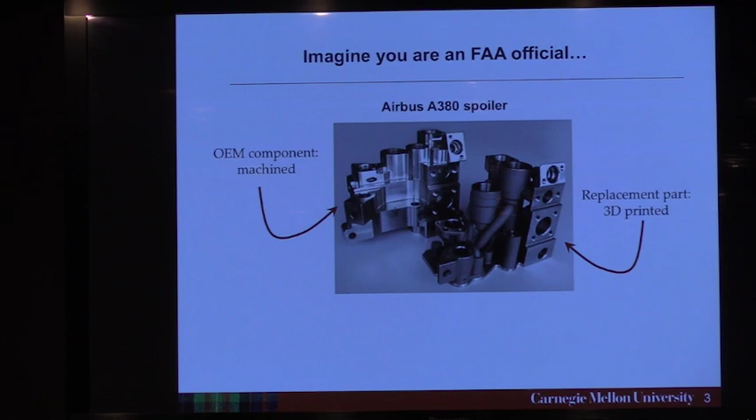So here's an Airbus 380 spoiler, and someone comes to you, they say, I can make a cheaper Airbus 380 spoiler. And I can do it through additive manufacturing. The part on the left, that's the original equipment spoiler. It's made actually by machining a solid chunk of titanium material. But I've 3D printed the one on the right. It's got exactly the same dimensions, tolerances, everything.

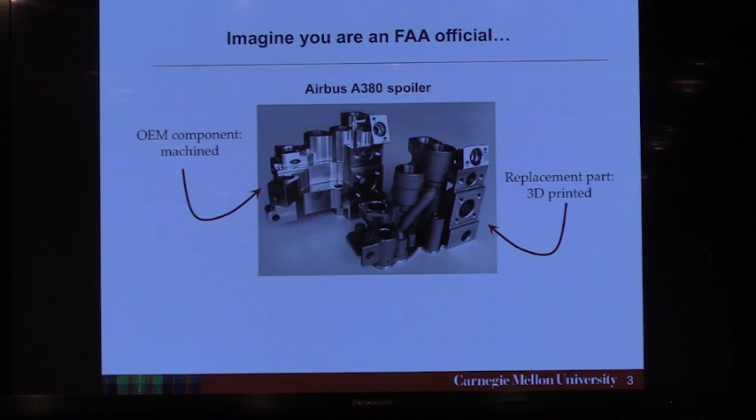It looks a little different because I've been able to take a little of that metal out, that they had to include because it was a machined part, but it's exactly the same thing. I made it with 3D printing. It's the same material. Do you approve that to fly? Do you trust that same design, same ingredients, mean the same performance? No. No more than a Pringles is a Lay's, right? You're going to have to figure out a way to say this is okay.

And that is one of the areas that artificial intelligence, computer science, data science, whatever term you want to use, comes into play. So now that we have a common basis for understanding why we might need to do something more with data, let me go on and show you what that might involve.

So it's a good classic way to do it. And it goes back to that high safety factor that Stefan mentioned for GE. We took a conservative approach. We can't do that anymore. So our new way has to be not breaking 1,000 or 10,000 parts. It has to be something more aligned with the additive manufacturing process itself.

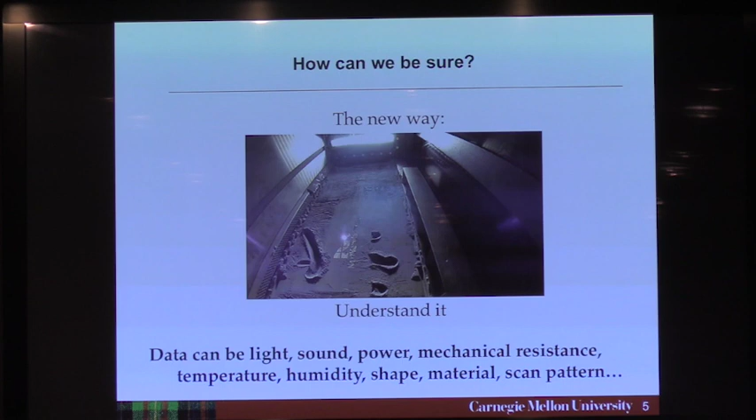So what I'm showing you here is the additive manufacturing process. This is 3D metal printing, and I thought we should actually look at it at least once as we're talking about it all. So what you're seeing is you're looking into the build chamber of the additive machine. That gray stuff is metal powder, very fine metal powder. It's been spread out with a squeegee on a plate. Oh, there's the squeegee going by. It's going to give us another layer.

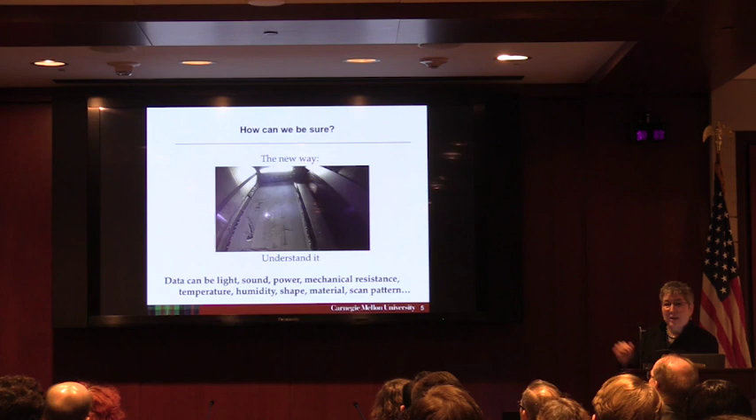Squeegee of the powder. That bright dot you see is the laser. The laser is melting the metal powder to whatever is beneath it. And layer by layer, we're going to build up. So you can see in this case, it's building our consortium's logo in a titanium metal package. The laser's moving around, really hot. If you had sound on this, which you don't, you would also be hearing a lot of sound. You'd be hearing buzzes and clunks and raps.

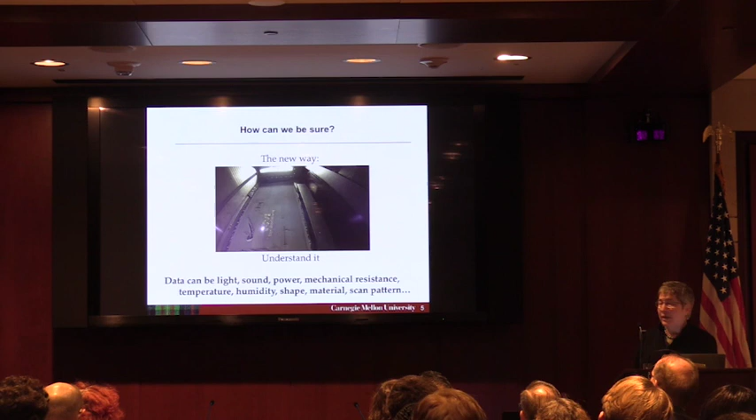So my point of showing you this in part is to show you what it actually looks like when you start to build up a 3D printed part. But it's also to point out that this is very different from something like forging, where you kind of put a piece of metal in there and it goes whomp. This, we've got data galore that we can extract from this.

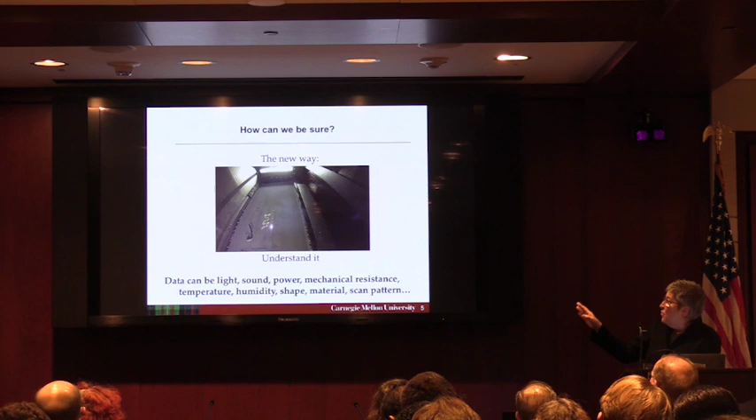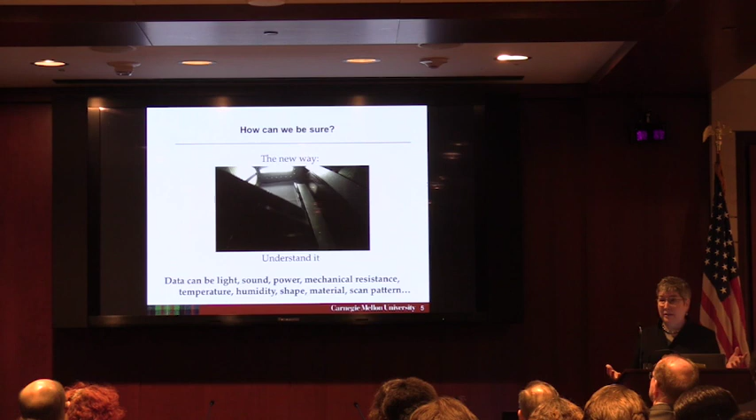We can look at the bright spot. We can look at the light data. We can look at the power data. How much energy are we pumping into the system? We can put microphones in the chamber and listen to the sounds, the acoustic information about what's happening, and so on and so forth. We can measure temperatures. We have the design data, the shape data for the part. We've got it all. This plethora, this abundance of data, and that's what we want to use.

So that's where AI comes in, or as it's sometimes called, data science. It's taking a lot of information, Amazon taking every single click that you make on their website and turning it into information knowledge that can be used.

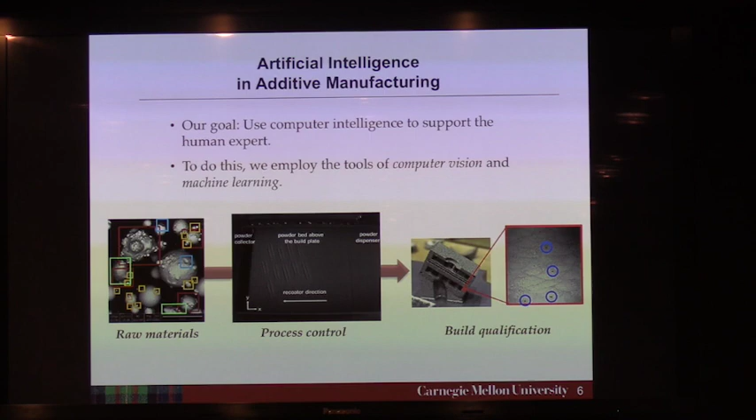So our goal here in my research group is to use computer intelligence to support the human expert in advanced manufacturing processes. And we use computer vision, which is using the computer to intelligently look at images, and we use machine learning, which is the computer learning as data comes in, what the trends are, what the decisions that should be made are. And we're going to do it for additive manufacturing at 3 levels.

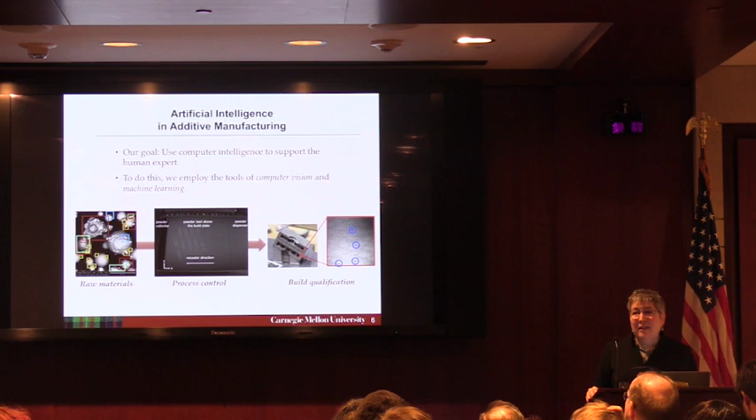The level of the raw materials, that's that gray powder that you saw, that's really, really important to the final part. Just like Pringles has to choose the right kind of potato starch in order to make a Pringle. We do it for process control, looking in the build chamber itself, how do we control that process on the fly? And we do it to qualify that final part for the FAA inspector to say that this part coming out of the additive manufacturing build is good.

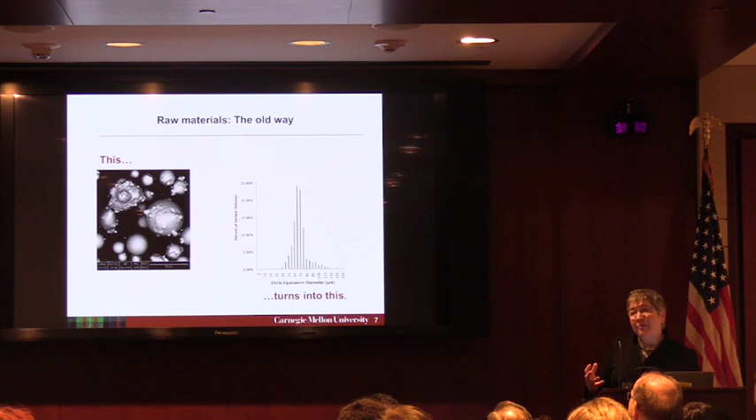Very quickly, hopefully no technical details beyond what you're willing to hear. Let's start with raw materials. The old way of dealing with raw materials was to take a picture of the raw materials. So it's a microscopic image of those tiny grains of that metal powder. And we turn that into a graph. This is a graph of the sizes of the powder particles. So we took this image that's quite complex, has a lot of information, and turned it into something quite simple, which just talks about size. And that's not enough. That's not enough richness to understand how these powders behave.

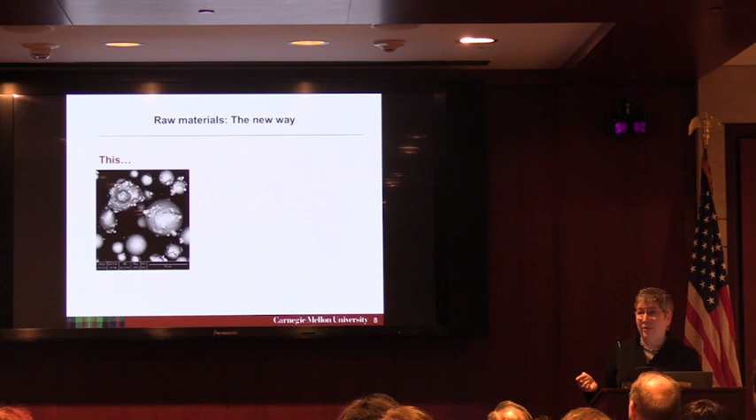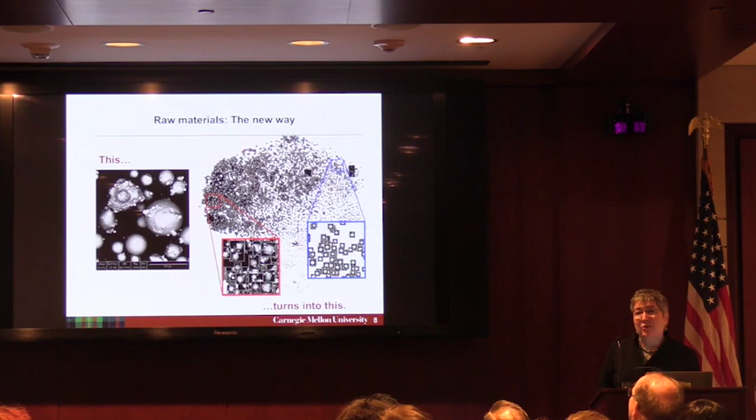And so our new way, using computer vision, we take the same image, but we have the computer identify every single powder particle and examine it and understand it. Is it crunchy and rough? Is it smooth and round? Does it have satellite particles attached to it? And the computer then learns what powders look like, and it sorts each particle into its own class. And we end up with this data cloud of particles.

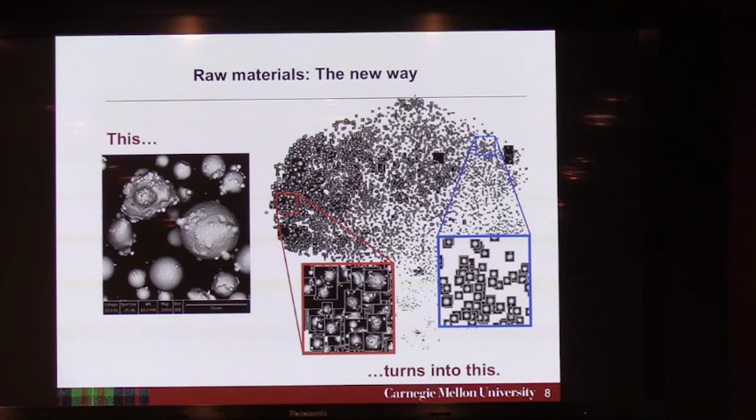Each of the little tiny boxes up there on that background image is a picture of one particle, one tiny, tiny microscopic particle of powder. There's over 40,000 of them in this image, but our actual data is hundreds of thousands. Then it becomes black on the screen. And if we look, they're sorted by the type of particle, size, shape, crunchiness.

So the upper right, the blue box there, is a bunch of particles that are small and round and smooth and good and well-behaved. And the red box are a bunch of particles that aren't. They're big and crunchy. They have lots of agglomerates. They're rough. And those bad particles affect the behavior of the powder when you put it into the machine. They affect how well you can build your part. And so with this data that goes far beyond size, we can do more with additive manufacturing. And that's the theme of my research group.

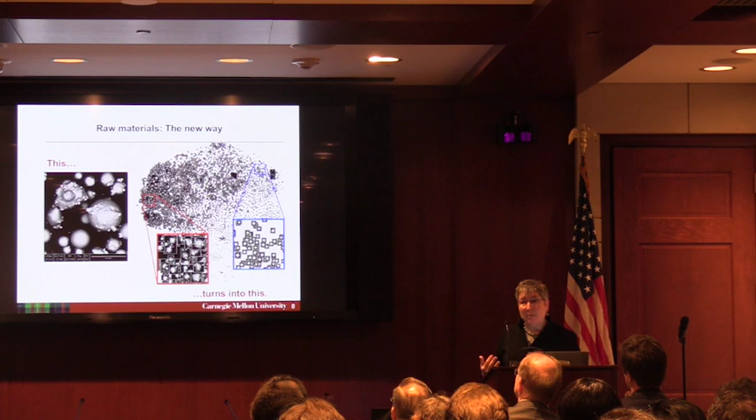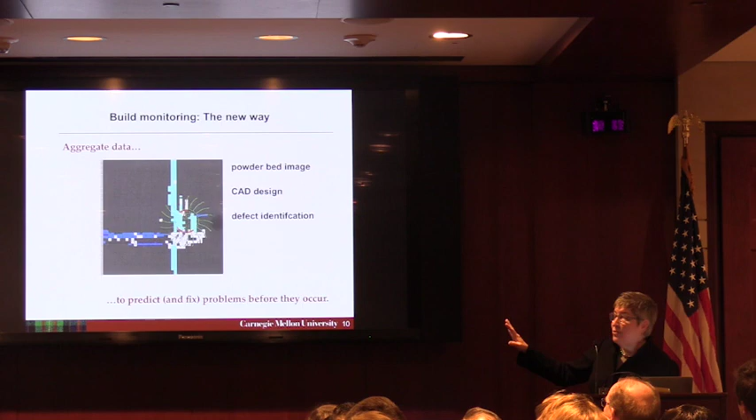So the new way aggregates all the data. We take the powder bed image. Here it's been pre-processed a little. We superpose it with the actual design that we intend to make, because there's important data about geometry there. We superpose that with a direct identification of defects using computer vision. And then we stack the layers up with each other to actually create a 3D image of what we expect our part to build like.

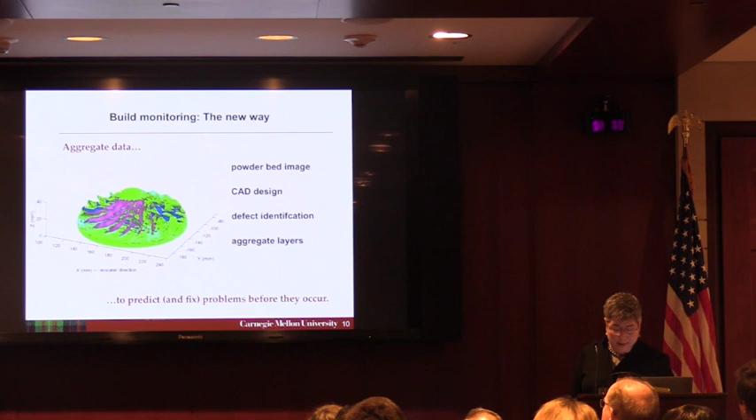And this is actually a fan blade, and that purple stuff, that's bad. We expect this part to build with some failure in the purple area. And then, of course, to make sure we're getting it right, we compare to a real build. And we find out that, indeed, in that purple area, we see that the fan blades did not build properly. We end up with a defective part. So our goal here is to predict problems and fix them before they occur.

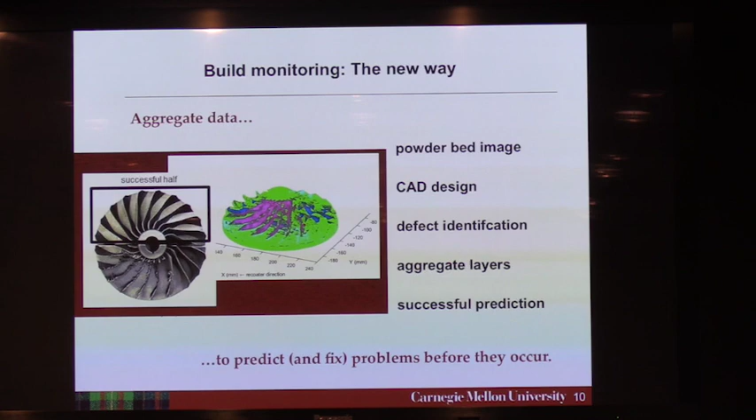Scanning through micrographs, as they're called, these images, is a really boring job. Finding and fixing defects is a really exciting job if you're an engineer. So they want him to work on the exciting and important part and leave the scanning to someone else. And if there's anyone who's good at doing really boring jobs, it's a computer. And so they came to my group to ask that.

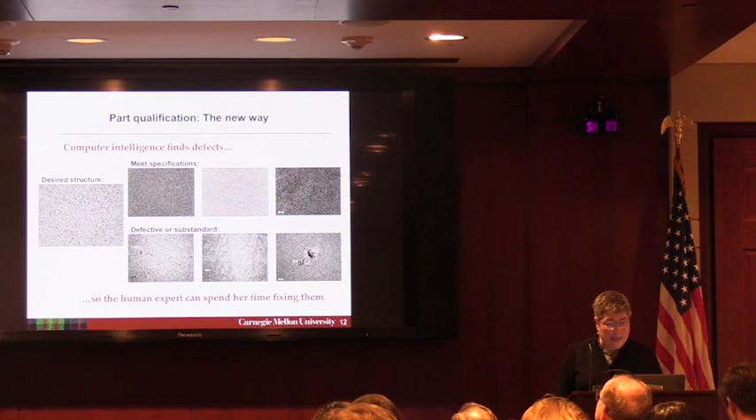And so what we have done is we have a system that we have put together with computer vision where they tell us what the desired structure should look like, and they send us pictures, or in our case, they send us samples, and we take pictures, and we find the pictures that meet specifications and that are fine, good to go. This is a batch of material that is fine. And we find defects of all different kinds.

And those defects may or may not be bad, but that's up to the human expert. That's where the human expert gets to do his job more efficiently, with more knowledge and more support. So the human expert spends his or her time fixing the problems instead of just looking for them in a rote way. And that's the part qualification part.

You could imagine now that the FAA inspector says to the part supplier, well, show me what the substructure of this part was. Show me if the microstructure, as we call it, the substructure, is adequate for the job. Show me a picture and let me put it through my system. And that is one of the steps, at least, in making sure that the new manufacturing process is producing something that we can understand, predict, and rely upon.